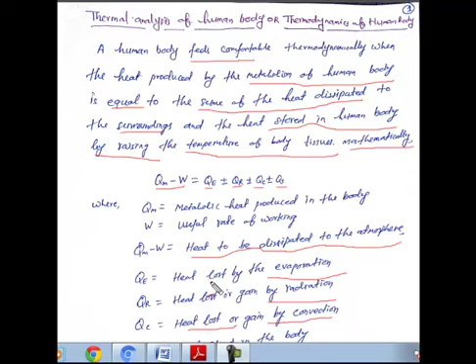In this case we have taken heat loss by evaporation only. This is not a gain, because by evaporation human beings do not absorb any amount of heat; by evaporation they can only release heat from the human body. Here Qs is the heat stored in the body.

The rate at which the body produces heat is termed the metabolic rate. A fasting man, weak or sick, will have less metabolic heat production compared to food energy consumption, because it depends upon the rate of food energy consumption by the person.

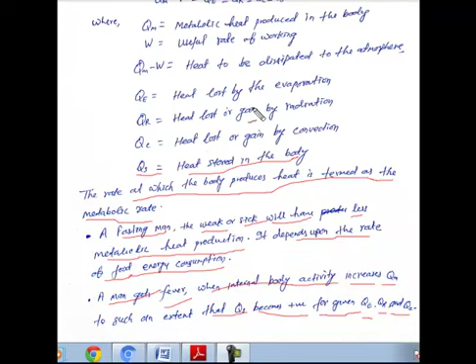A man gets fever when internal body activity increases Qm to such an extent that Qs becomes positive for a given Qe, Qr and Qc. Here Qr, heat lost or gained, may be heat absorbed by the human body by radiation, or heat lost by radiation from the human body to the environment. Similarly, heat can be lost by convection from the body, or absorbed by convection by the body.

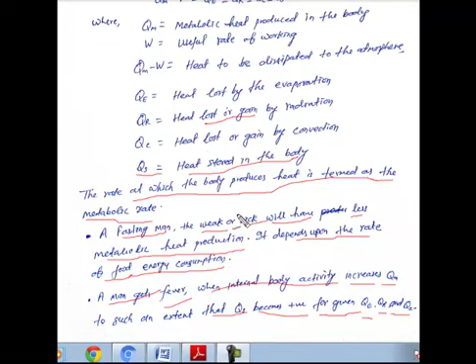Also, Qs is heat stored in the body, because the heat transfer rate depends upon the temperature. If the body temperature is high, then heat will be lost by the body to the environment, and if the temperature of the environment is high, then heat transfer takes place from the environment to the body.

We know that the heat stored energy Qs has a maximum and minimum limit; when exceeded it brings death. Body temperature exceeding 40.5 degrees Celsius and falling below 36.7 degrees Celsius is dangerous. Both these values indicate the limited temperature range of the human body. We can never go above 40.5 degrees Celsius nor below 36.7 degrees Celsius in the comfort zone. When we go above or below this limit, we feel uncomfortable.

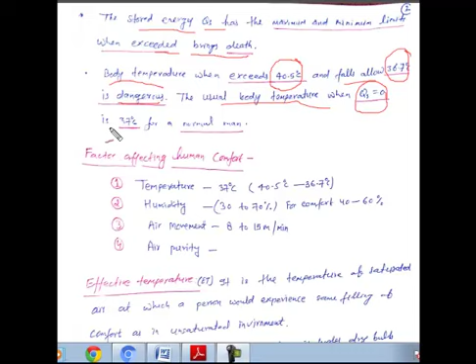The usual body temperature, when Qs is equal to zero, meaning there is no heat stored in the body at that time, is 37 degrees Celsius for a normal man. A normal man has a temperature of 37 degrees Celsius when they cannot absorb any heat.

Here are the factors affecting human comfort. There are four parameters on which human beings feel comfort; these parameters affect the comfort of human beings. Already we discussed the temperature.

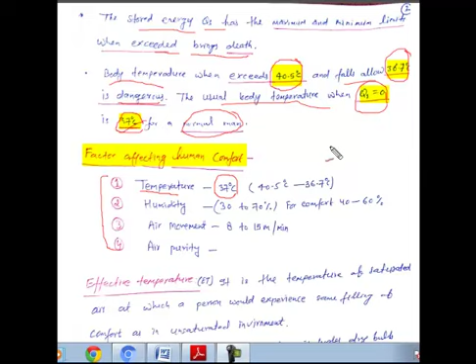The range of temperature varies from 40.5 degrees Celsius to 36.7 degrees Celsius, but human beings feel comfort at 37 degrees Celsius, when the body does not absorb any amount of heat. The normal temperature of the body is 37 degrees Celsius, but the range is this. To feel comfort, that is 37 degrees Celsius.

The second parameter is humidity. Here 30 to 70% is the range for comfort. 40 to 60% relative humidity is used in our air conditioning system.

The third one is air movement. This is the velocity of the air at which human beings feel comfort, that is 8 to 15 meter per minute. When the velocity of air increases beyond this limit, human beings feel uncomfortable.

The fourth one is air purity. If impurity is dissolved in the air, human beings feel uncomfortable and suffocated, so ventilation is needed to maintain air purity. In an air conditioning system, a ventilation system or ventilation duct is required to maintain air purity.

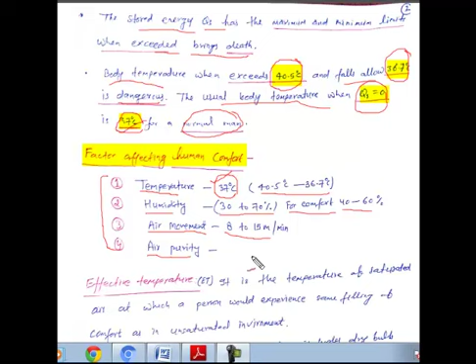Now we come to effective temperature. It is the temperature of saturated air at which a person would experience the same feeling of comfort as in unsaturated air or unsaturated environment. Here unsaturated means when air has not absorbed 100% humidity, that air is known as unsaturated air.

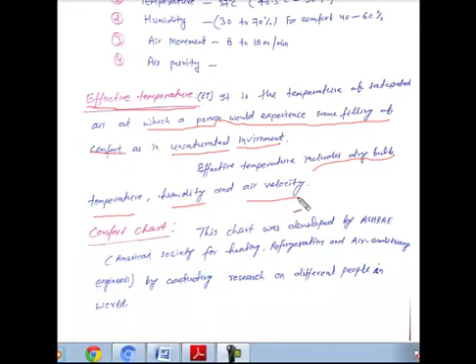The temperature of the saturated air in which human beings feel comfort is known as the effective temperature. Effective temperature includes dry bulb temperature, humidity ratio, and air velocity. The effective temperature also depends on these parameters, and when these parameters vary, the effective temperature also varies. Finally, we get the temperature of saturated air in which human beings feel comfort, and that temperature is known as the effective temperature.

Now we come to the comfort chart. This chart was developed by ASHRAE, the American Society for Heating, Refrigeration and Air Conditioning Engineers, known as ASHRAE. This is a society which works on the refrigeration and air conditioning parameters on which human beings feel comfort.

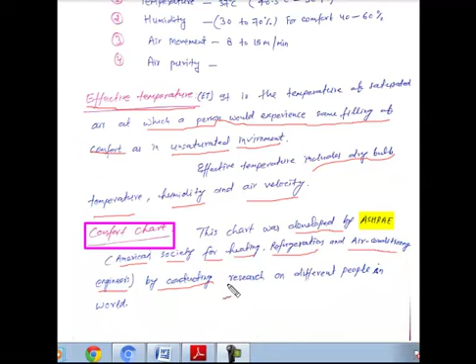This society conducts research on different peoples in the world. After researching, they have found some parameters on which human beings feel comfort in the summer season and also in the winter season. Using those parameters, they have drawn a chart, known as the comfort chart. In this chart, dry bulb temperature is taken on the x-axis, wet bulb temperature is on the y-axis, and the remaining lines are taken from the psychrometric chart.